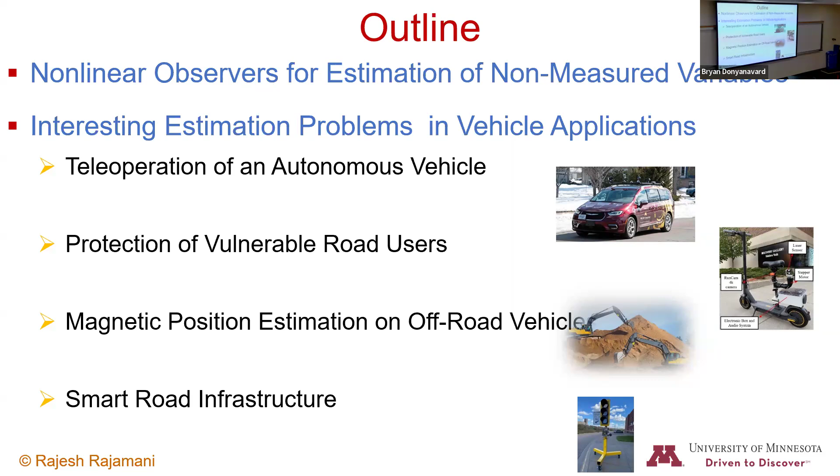Yeah, it seems to. I think if you use the mouse to click the slide once, it should. Okay. Now, hopefully it's run. Okay. So

My lab does a lot of work on nonlinear observers. And what are nonlinear observers? Basically, they're used to estimate variables that we cannot directly measure. So typically, in a nonlinear observer, what you do is you have a dynamic model of the system and combine the dynamic model with some measurements to estimate all the variables that you're not able to measure. So some examples of estimation algorithms, observers, are as follows.

Use of an inertial measurement sensor and GPS to estimate variables such as slip angle and tire road friction coefficient. So slip angle on a vehicle is a very important variable. It's basically the angle of the velocity vector with respect to the direction of the vehicle. It's an important variable that you need to know because it tells you how the position of the vehicle is evolving, but it's not a variable that you can measure. Likewise, tire road friction coefficient tells you how slippery the road is, and that again is a variable that you cannot actually measure with regular inexpensive sensors. So what you do with estimation algorithms is you estimate these kinds of variables. You combine dynamic models together with well-designed algorithms and you estimate these variables. So those are called nonlinear observers, for example.

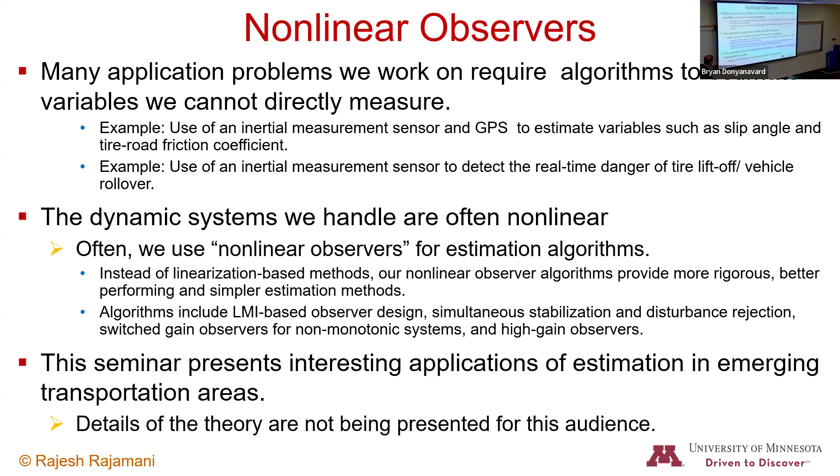And we normally publish theoretical papers primarily on observers for nonlinear systems. So these are some examples of theoretical papers that we've published in the last few years, in Automatica, in IEEE Transactions on Automatic Control, IJRNC, and so on. So all the theoretical work we do is on this topic, observer design for nonlinear systems, and we publish those kinds of papers. But this talk is really not going to talk about these theoretical results.

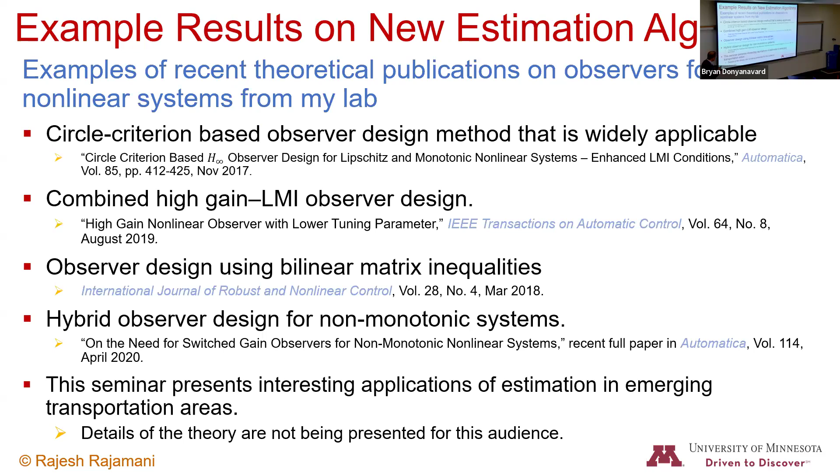As far as today's talk is concerned, we're just going to see how estimation is used in some very interesting applications, and how it enables some novel applications. That's what it's used for. Okay, it seems like my pointer is working now. So the first topic I'm going to talk about is teleoperation of autonomous vehicles.

What is the motivation behind teleoperation of an autonomous vehicle? We say that autonomous cars need occasional human intervention and teleoperation. Typically when you're testing an autonomous vehicle, there is a safety driver in the car, and if something goes wrong, the safety driver takes over. But you need teleoperation if you want to scale up deployment, otherwise you'd need a safety driver in every autonomous vehicle on the road. So that is one of the motivations for having teleoperation.

Teleoperation is used widely in a bunch of applications in the real world. I don't know if your campus has food delivery using robots, but our campus does, and that is entirely teleoperated. You can order food, the robot comes to the door of your building, you enter the code inside the robot, and then you take your food. So that is a widely used teleoperation application.

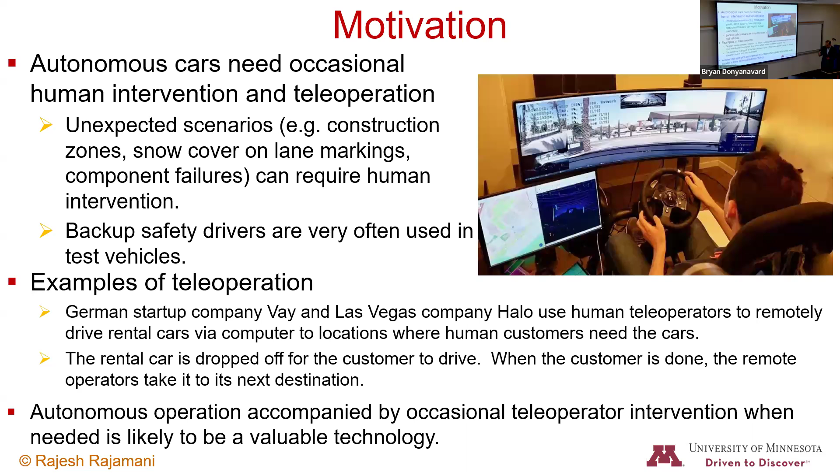So what we feel is that autonomous operation accompanied by occasional teleoperation or operator intervention is going to be a very valuable technology in the future. Now what I'm going to talk about today is one aspect of teleoperation called predictive display.

For teleoperation, what you need to do is transmit a lot of camera images from the remote vehicle to the teleoperator station so that you can recreate the environment of the vehicle for the teleoperator. The teleoperator needs to see what the environment around the remote vehicle is so that he or she can drive the vehicle remotely. So you need to recreate that.

Now, the challenge with recreating the remote vehicle environment is that camera images are bulky, it's a lot of data, and you need to transmit that using wireless networks. You might not have 5G everywhere, and even with 5G, it's very difficult to actually transmit camera images sufficiently fast. So what happens is you end up getting a lot of variable latency, meaning the camera images arrive after quite a bit of delay.

What we have found is that if there is a delay of even 170 milliseconds or more, it starts becoming quite difficult for the teleoperator to drive the car. So the technology that we are working on is called predictive display.

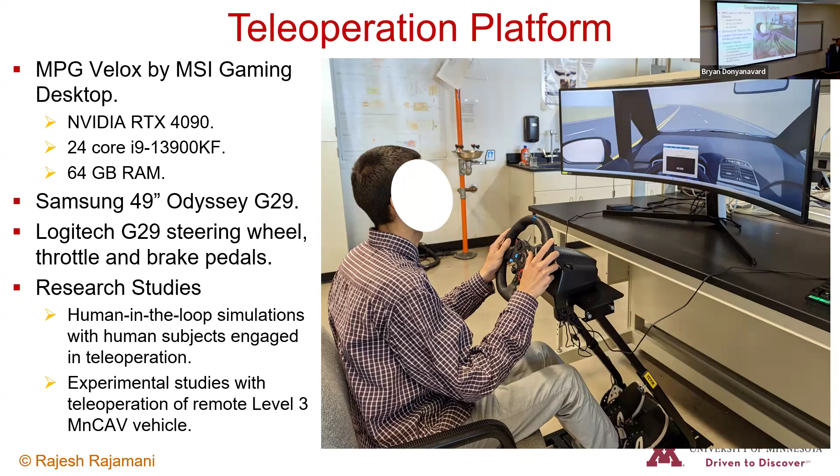There are two types of studies that we've done so far on teleoperation. We have done human-in-the-loop simulation studies, where we have simulation software and a human subject controls one of the vehicles in the simulation. We also have an autonomous vehicle, and we want to do experimental studies using our autonomous vehicle for teleoperation.

Let me tell you a little bit about one aspect of teleoperation that we have addressed: how to track trajectories of nearby vehicles. For the remote vehicle, we need to track the trajectories of all the nearby vehicles, because we need to use that information for updating the display.

So what has happened in the past is that target vehicles are tracked using estimation algorithms, but they are often modeled by very simplistic dynamic models. For example, the model might say each vehicle has decoupled lateral and longitudinal motion, with lateral acceleration equal to 0 and longitudinal acceleration equal to 0. So those kinds of simple models are typically used, or the kinematic model is used.

In this kinematic model, the states are position, velocity, acceleration, orientation, and slip angle, with some kinematic equations. It turns out this type of model is good for inertial position and inertial trajectory variables of the vehicle, but not good for relative variables. Because the radar on your car is on a moving car, your car has rotational motion and accelerations, and you're measuring the distance to another car with it. Because it's a relative measurement instead of an inertial measurement, this model gives you errors and doesn't work all that well.

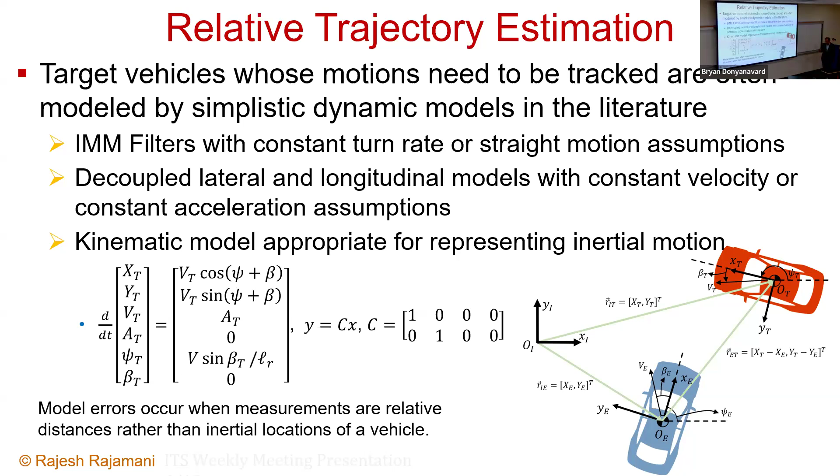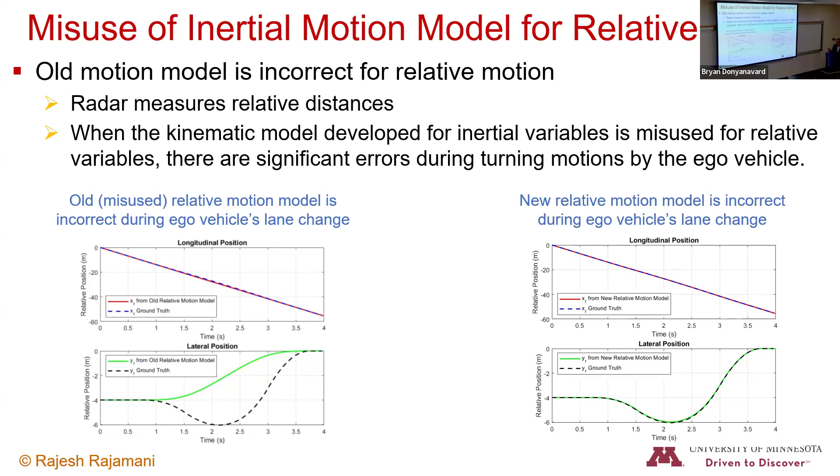So what we have done is found the right kind of model to use. What we do is write down the inertial dynamics of each of the vehicles, the ego vehicle and the target vehicle. We write down the inertial dynamics of each, define state variables which are the relative motion variables, and find the dynamics of the relative motion variables correctly.

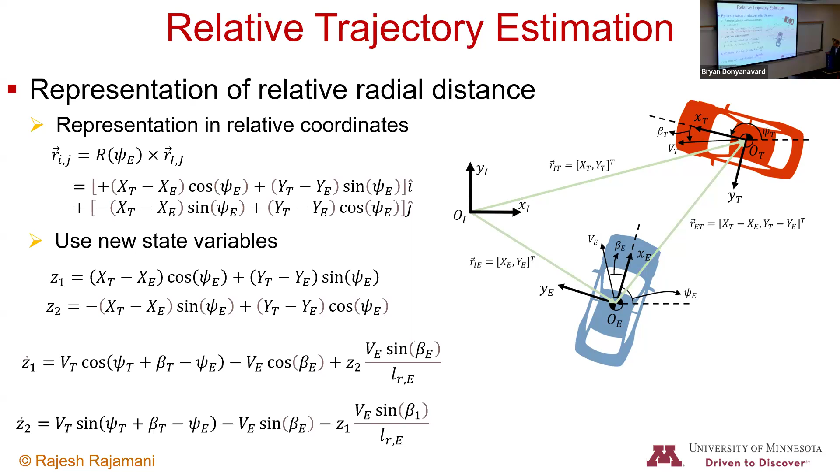And this is the type of model we get. This model has 6 states. The states are lateral and longitudinal relative distances, and then velocity, acceleration, orientation, and slip angle of the target vehicle. So it's a combination of relative variables and variables related to the target vehicle. Those are the states, and then we have nonlinear dynamics, as you can see here.

The inputs to this model are - we assume that the velocity of the ego vehicle and the slip angle of the ego vehicle are known. These are variables that we need to estimate as well. So this nonlinear model together with nonlinear observer design is what we use for estimation of trajectory variables of each tracked target vehicle.

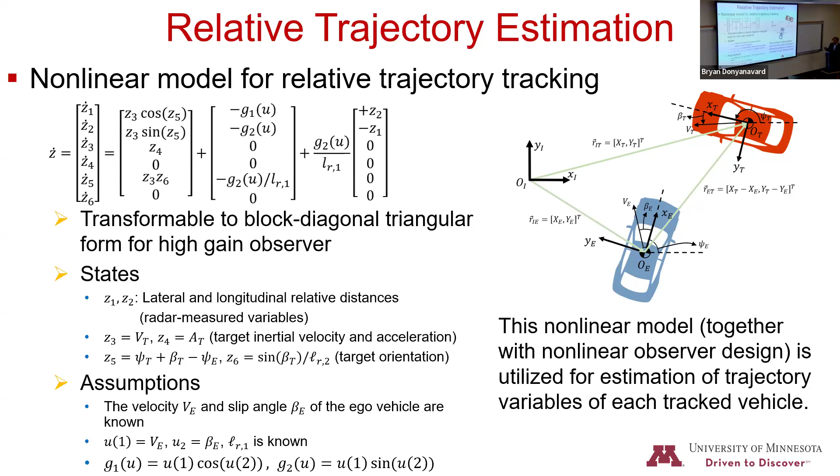So now what I'm going to show you is how we use these algorithms for estimating. We estimate the ego vehicle position and orientation, and we estimate the nearby vehicles' position and orientation. So we use that for predictive display.

The human subject studies that we have done with the simulation model: there are going to be 5 human subjects, and they're going to drive on this route that you see over here. Some parts of the route are pretty curvy, so the driver has to really pay attention and drive properly in order to stay on the road and not leave the lane.

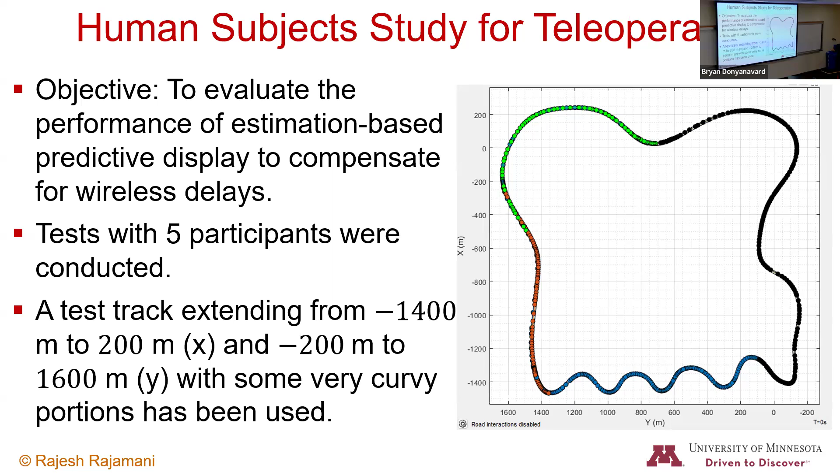This is what the simulation model looks like. In this particular case, we have 4 lanes here, 2 in each direction.

This is what the teleoperation station looks like. You are basically sitting here, and it is very similar to how a real car would be. You are going to see the road through this, and you're going to do teleoperation. The speed of your car is displayed over here, and you can see the lane lines and so on.

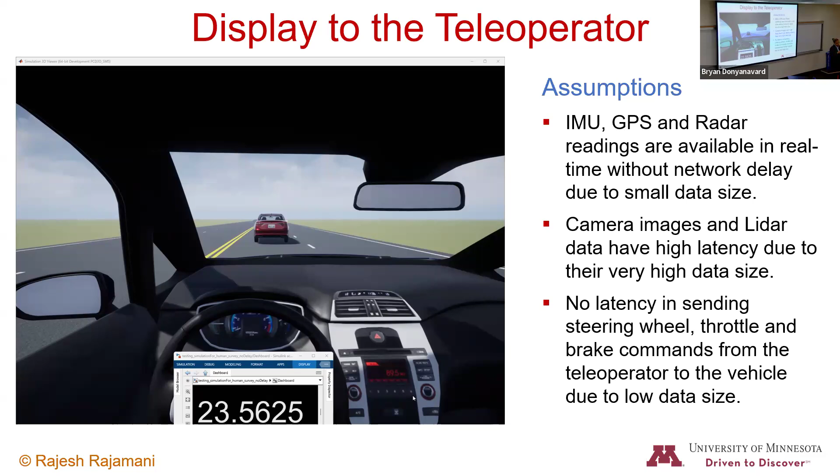So we assume that there is no latency in sending steering wheel, throttle, and brake commands from the teleoperator to the vehicle, due to low data size. These are variables that have very small data size, so there is no latency in sending your throttle and brake commands. But there is a lot of latency in receiving the camera images.

This video basically shows you what happens when there is a 0.5 second delay. I told you earlier that even a 170 millisecond time delay starts becoming difficult. This video is going to be with half a second of time delay, and with half a second, it is very difficult for the teleoperator to do that - almost impossible.

Let's look at this video here. The teleoperator is trying to drive and stay on the road, and he's not able to do a very good job. You can see here that the car keeps leaving the lane, he's going outside the lane, because of the half a second delay. It's pretty difficult to drive with the half a second delay.

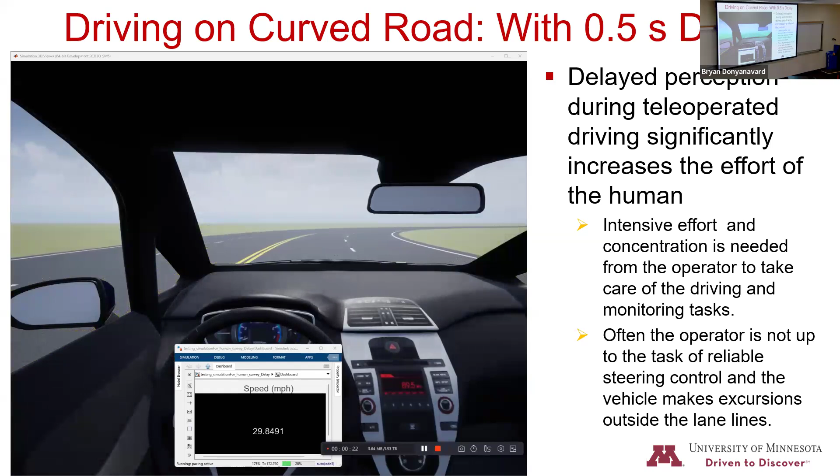There is intensive effort needed for the teleoperator as well because of the time delay. You have to really be paying a lot of attention and trying very hard, so this makes the driving task very difficult. And in spite of the driving task being very difficult and requiring a lot of effort, you keep going out of the lane. Pretty difficult task.

Now, on the other hand, with our predictive display system, you'll see in this video that the driver is able to stay in the lane. It becomes much easier to drive. Also, the driver is actually able to use much higher speeds, stay in the lane, so the driving task really does become much easier.

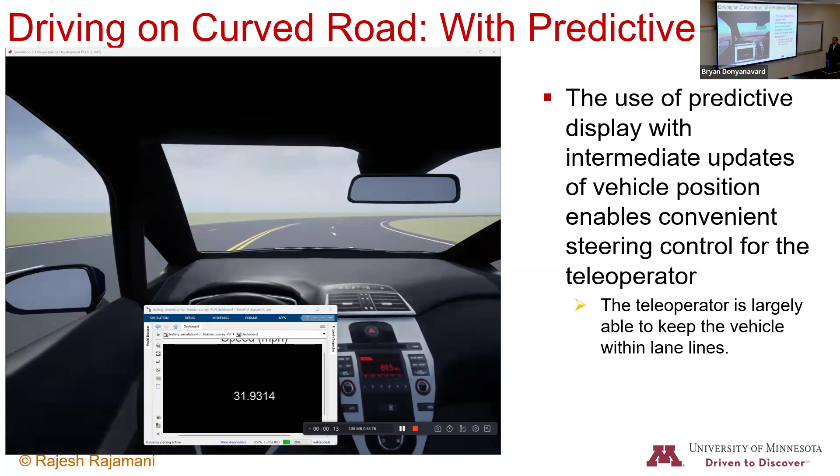So this is driving with the predictive display, and unlike what you saw in the previous video, here the driver is able to stay in the lane, not really going out of the lane at all here. So this is what predictive display is useful for.

So if you look at our data with the 5 human participants, each participant was driving for 10 minutes in each of 3 scenarios: without any time delay, with a half a second time delay, and then with the predictive display. First, he or she drives without any time delay so they get used to the simulator, then with the half a second time delay, and with predictive display.

What you can see here is when there's a half a second time delay, the driver goes out of the lane many times, approximately 11 times out of the lane. On the other hand, with the predictive display, the performance is as good as that of the system without any time delay, so the user hardly goes out of the lane.

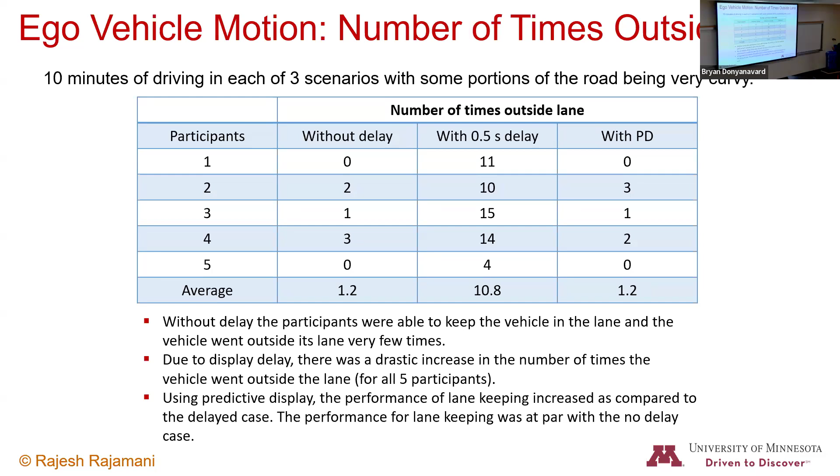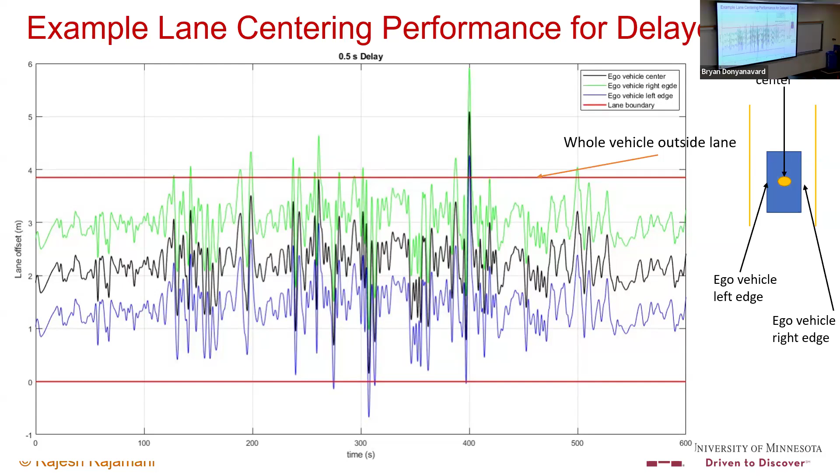Furthermore, the excursion outside the lane can be very big when you have a big time delay. This is an example from one of the human subjects, showing the lateral distance, and you can see that the edge of the car is going outside the lane. Not only is it going outside the lane, it has a pretty large excursion, like 2 meters outside the lane. On the other hand, with the predictive display system, the car is entirely inside the lane for this particular example.

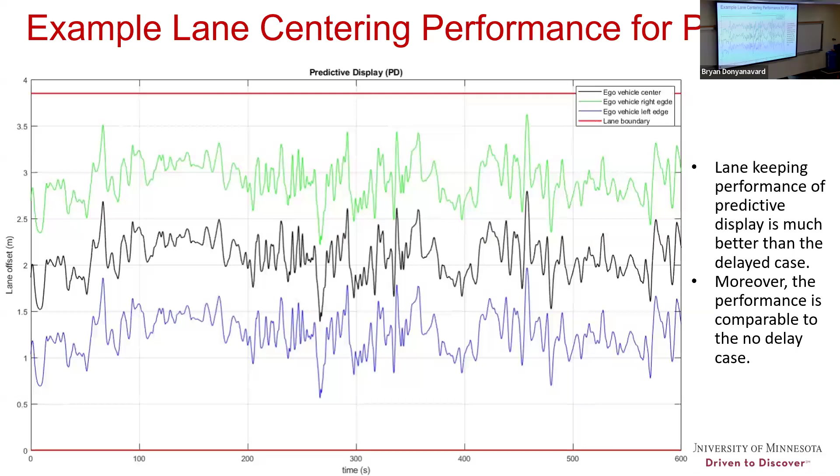So that is work using the simulator and human subjects. Now, what we want to do next is actually use this on a real autonomous vehicle. This was a simulation study, even though we used human subjects for experimental inputs, but now what we want to do is use this with an autonomous vehicle.

So what we are doing for that is developing this predictive display system so that you can use real camera images. In this predictive display system, we use a combination of LiDAR and camera images. We take the LiDAR point cloud and project it onto the camera image. We find all the pixels on the camera image which have the LiDAR points, and then we know the distances to those points.

Then what we do is state estimation. For the ego vehicle, we find the new position and the new orientation of the ego vehicle. In other words, if you have a camera image and you know the distances to all the pixels on the image, and you know that the ego vehicle has moved this much with this new orientation, then you can take the old camera pixels and transform them to create new camera pixels. So then you get the refreshed or updated camera image.

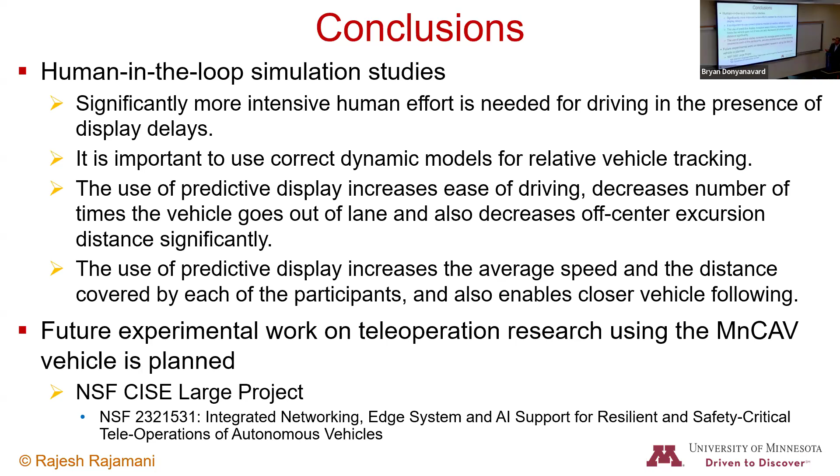Okay. Sorry, I'm going in the reverse direction.

Okay, so this is the autonomous vehicle we have at the University of Minnesota. It's called the MnCAV vehicle, basically a full-scale Chrysler Pacifica minivan. It was set up by a vendor called Dataspeed, a pretty well-known vendor, and they instrumented the vehicle with a whole bunch of sensors: 3 Ouster LiDARs, a dual antenna GNSS system, a whole set of cameras, a forward-looking radar, a rear-facing radar, IMUs, and lots of other sensors.

Then they set up ROS-based software for vehicle control, wiring all the sensors to computers. They have done some low-level work on the vehicle, like enabling it to follow a desired acceleration and enabling the steering angle to follow a desired steering angle. So they implemented some of these things, and then my lab has actually implemented some of the autonomous driving functions on this vehicle.

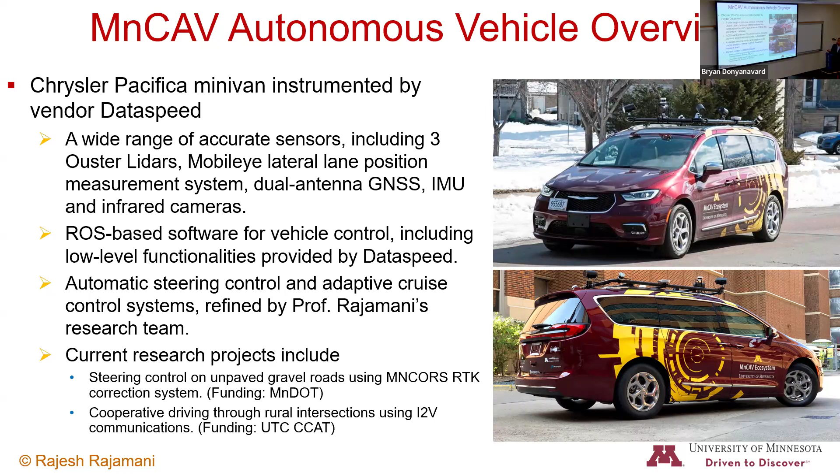Okay, so we have a couple of projects using this autonomous vehicle in my lab. One is on steering control on unpaved gravel roads using GNSS - this is a project funded by MnDOT. We also have a different project on cooperative driving through rural intersections using communications from the intersection, funded by a UTC, University Transportation Center. So these are the 2 projects on the autonomous vehicle that we are working on.

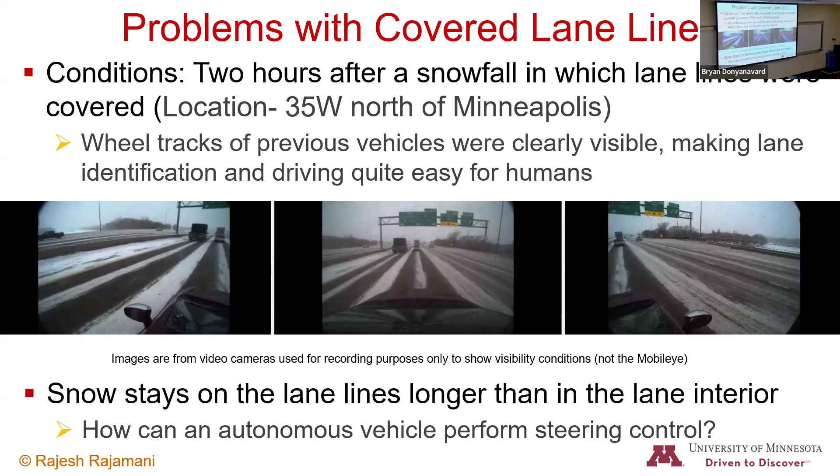We have collected data that shows that snow stays on the lane lines longer than in the lane interior. And there are also other situations where lane lines may not be available for steering control - not only snow-covered roads, but also low-volume rural roads, including gravel roads. These low-volume rural roads may not have any lane lines, they may not even have a center line because these are small roads. So you really cannot depend on lane lines to use your camera and drive.

Also, some states have a lot of gravel roads. In Minnesota, we have over 70,000 miles of gravel roads - 70,000 miles, okay? So gravel roads have absolutely no lane lines. There's other kinds of problems with gravel roads as well - their quality keeps changing with time, and they have to be cleaned up and pressed every once in a while.

So how do we drive on such types of roads? Now that is important because one of the applications we will talk about for autonomous vehicles is actually rural environments. In rural environments, you might not have much public transit, and you might have older people who are not able to drive. If you have autonomous vehicles, that would be incredibly useful. But in rural environments, you also have a lot of gravel roads and low volume roads.

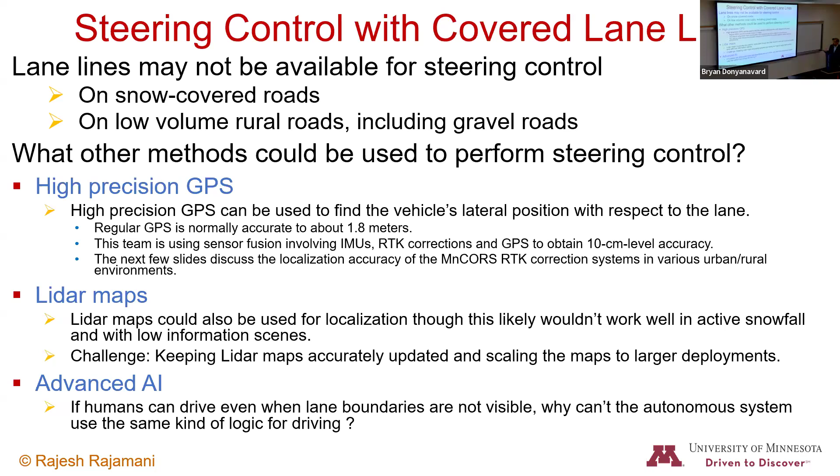We have some of this MnCORS that supposedly works all over the state, and that's what we're trying to use for our driving, for our driving of the MnCAV vehicle. So how well is MnCORS going to work? How accurately can you find your position, and can you do steering control using GNSS? That is the question.

It turns out that in rural environments, this is the rural road, you get more than 20 satellites all the time. On a rural road you have clear visibility to the sky, good visibility to the satellites, and you can see all of them. More than 20 satellites are visible here all the time, so you're going to get pretty good GPS measurement over here.

But if you look at downtown, out of 14 minutes or so of driving, for 4 minutes there was absolutely no signal. Downtown you have all these tall buildings, so you might not have any GPS at all for a significant portion of the drive, and sometimes you have very few satellites available, sometimes none, sometimes very few. Local roads, basically suburban roads, you can again have some pretty good satellite visibility, but if you have local roads with trees, then you can lose visibility to the satellite sometimes as well. So that is another thing to keep in mind.

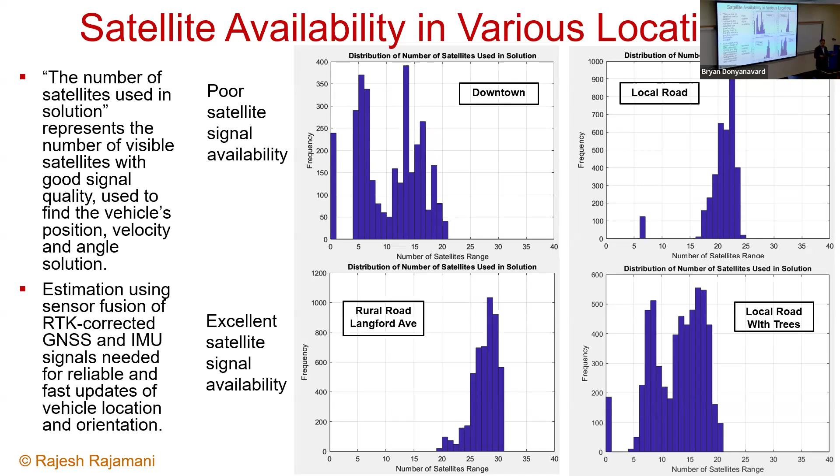This is a system that we have developed and implemented on the car. It's basically a feedback plus feed forward control. You need a feed forward term for going around sharp curves. For going on straight roads, you only need the feedback term.

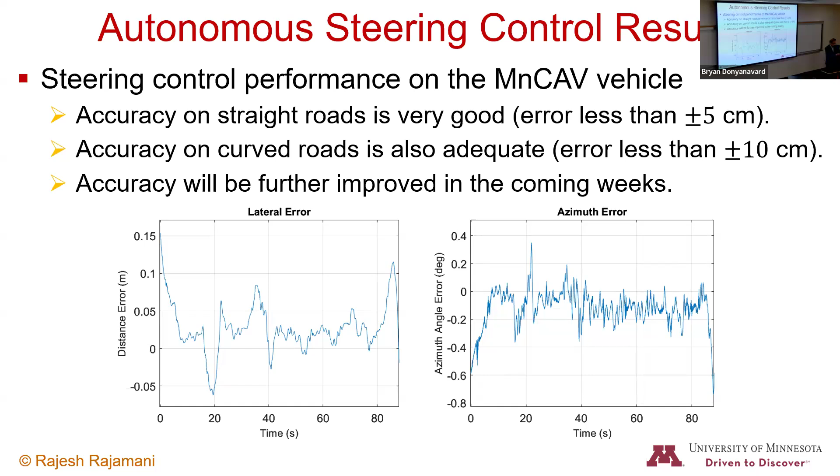Okay, so I'm moving on now to the next one. These are all projects that have used estimation algorithms for enabling some interesting autonomous driving applications. Now I'll talk about a different application in which we've used estimation algorithms again.

This is on wake surfing boats and off-road vehicles. This is an entrepreneurship-related project, funded by an NSF-PFI grant.

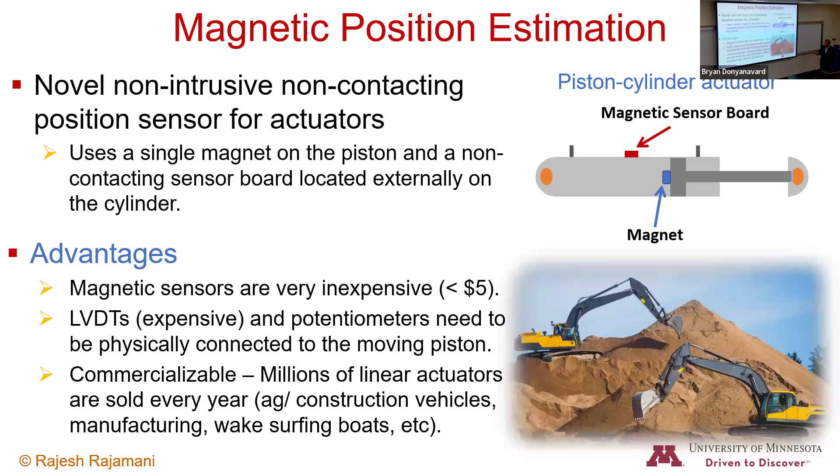Now the advantages of this type of system are that magnetic sensors are very inexpensive—depending on the sensor, it could be $1 a sensor. So we're competing with other sensors like LVDTs and potentiometers. Millions of linear actuators are sold every year for ag vehicles, construction vehicles, manufacturing, wake surfing boats, and so on. So the market for actuators and the need for position sensors on them is actually pretty big.

So you can use them, for example, to see if the actuator has reached the end of stroke. It's just a proximity sensor. But if you actually want to measure position throughout the stroke, then you need to use the magnetic field, as you can't just use a threshold.

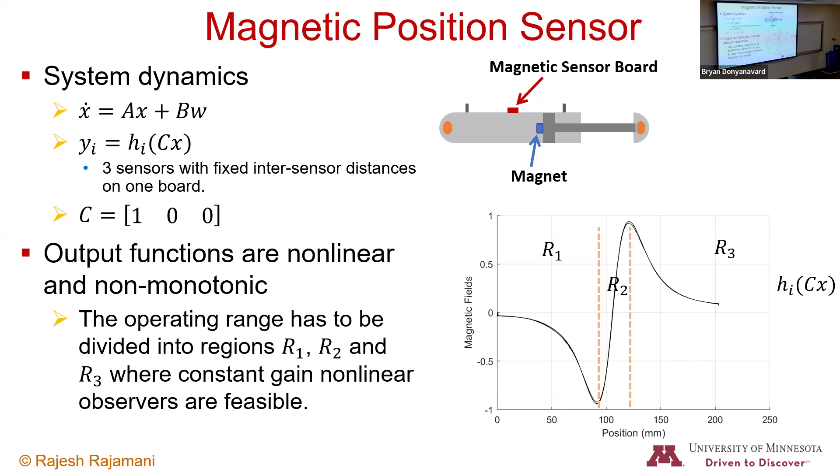You need to actually model the magnetic field as a function of position and then use that. So this is what we do here. We use this model, and then we divide the region into 3 regions which are monotonic, since otherwise this is a non-monotonic function. Then we use a nonlinear observer design method that relies on the nonlinearity being monotonic, so we essentially have 3 different observer gains for these 3 different regions.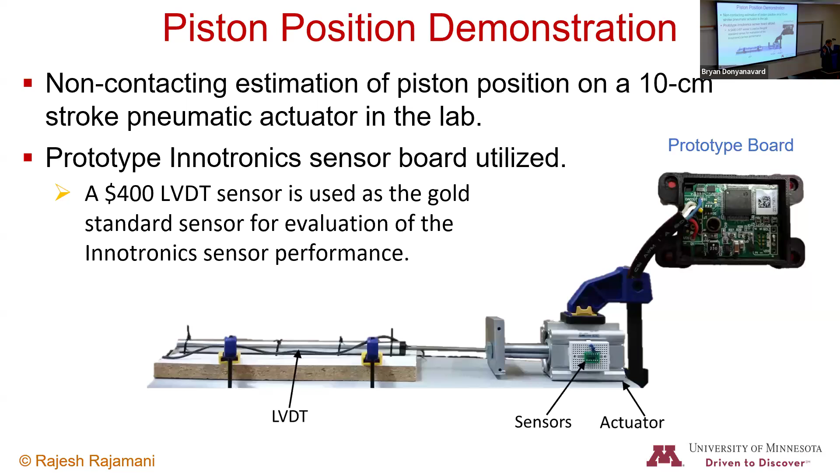Now the LVDT is a really good sensor. It can give you 0.1 mm accuracy. But it is $400. Plus it needs to be physically connected to the piston. Our sensor, on the other hand, is a $50 sensor. It doesn't need to be connected, you just put it on the outside. No connection, right? It's a non-contact sensor.

So our company is called Innotronics, our startup company. And this video here... I think I need to click on the video.

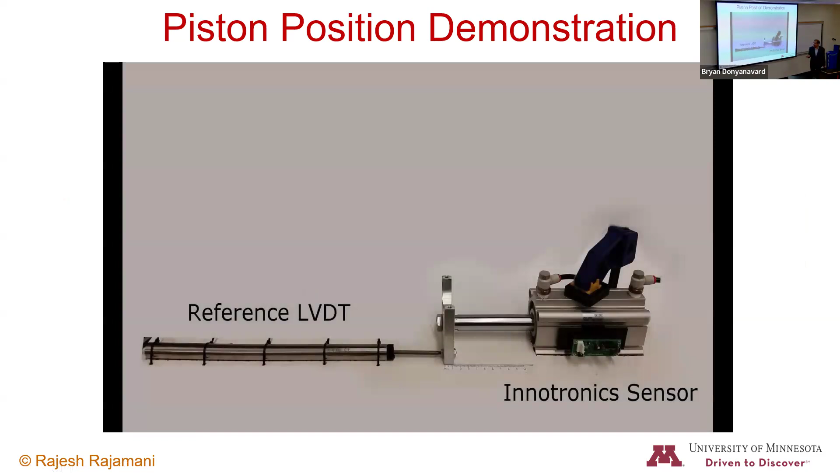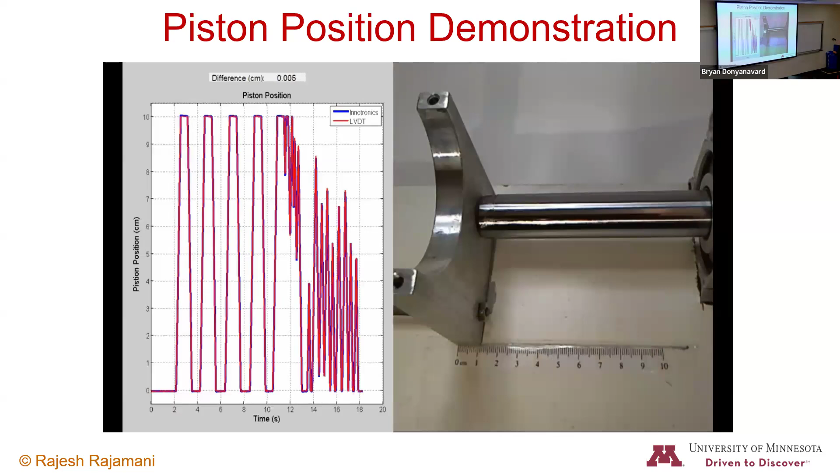So what you can see here, this is the actuator, and this is the real position that you can see in the ruler. And here you can see our estimates and the LVDT sensor readings. You can see that our estimates and the LVDT sensor readings are kind of on top of each other. You can also have high bandwidth motion, fast motion, and you can still track the position quite well.

Typically for this 10 centimeter stroke length, we get less than 1% error, less than 1 mm error, as you can see over here. So this is the estimate versus the LVDT reading, and you can see that the magnetic sensor follows the LVDT sensor quite well.

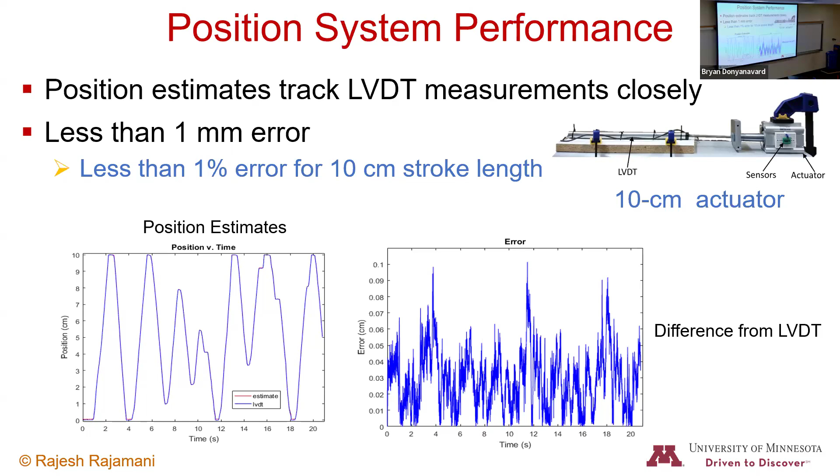So what we are working on now, we have this new NSF PFI-TT project. We're trying to make this technology work better for long stroke actuators, because this was a small stroke actuator, 10 centimeter stroke. You can imagine on a construction vehicle, they're going to have like 70, 80 centimeters, one meter kind of stroke. So it has to work over a very long stroke. That's what we're working on now.

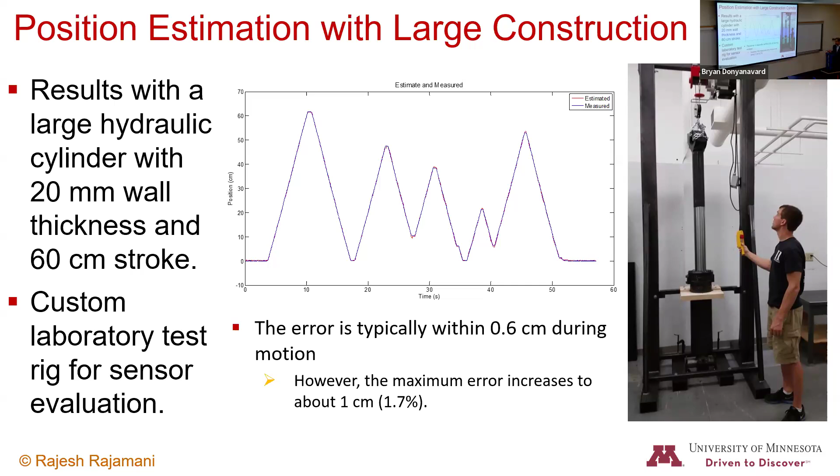And so this is a test rig we have in our lab. This is basically a thick walled cylinder with a long stroke. There is a motor and a winch that we have for moving this up and down, and then we can put magnetic sensors on it and do estimation. So this is what we are working on.

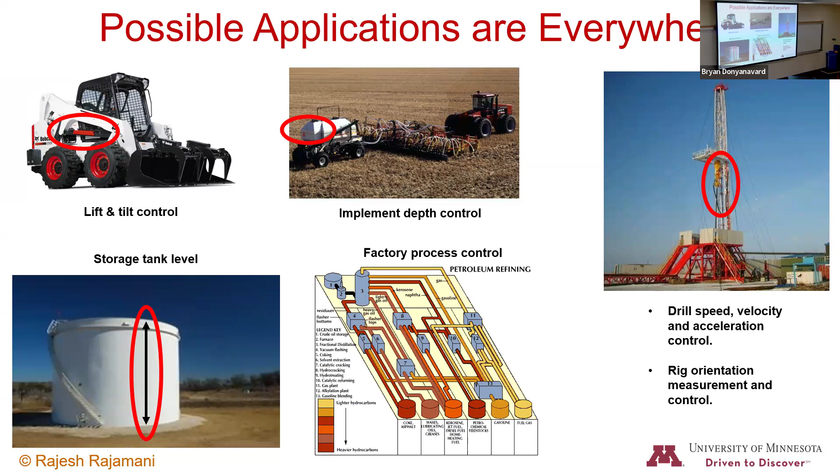So there are a lot of applications for these actuators, like I told you. This is called a planter, an agricultural vehicle, in which they have 30 actuators. They actually have 30 actuators at the same time seeding the soil. All the 30 actuators are being used simultaneously, and such actuators are used in all kinds of oil rig applications and so on.

So we established this company in 2015, basically, and we are selling currently over 11,000 sensors a year. We had a slight hiccup last year where they ran into some problems, and so those problems have been fixed, and so we are hoping that the sensor sales take off some more.

But basically, right now, we have mostly one customer for the sensor. It's boat manufacturer Mastercraft, and they use actuators behind the boat for doing wake surfing and wakeboarding. So they customize the waves behind the boat by using an actuator, and our sensors are being used on those actuators for measuring position. So currently we only have one customer, but we are selling quite a few sensors to that customer.

And if our sensors become more reliable in the future, if they can work for longer stroke actuators, then we might be able to find more customers in the future.

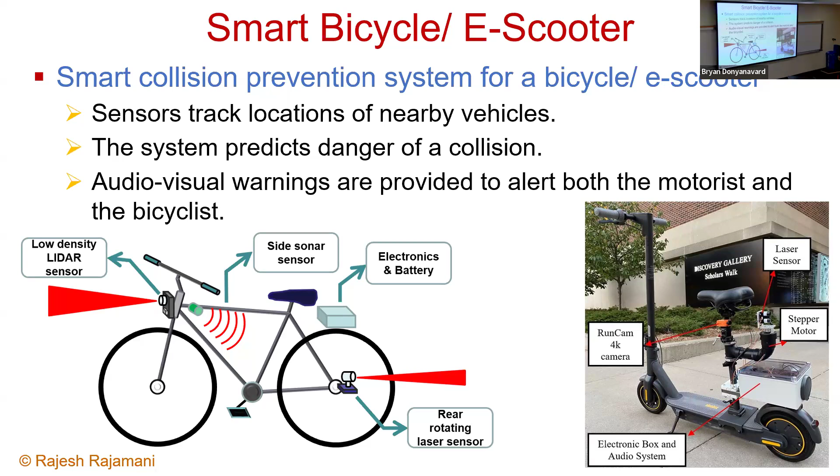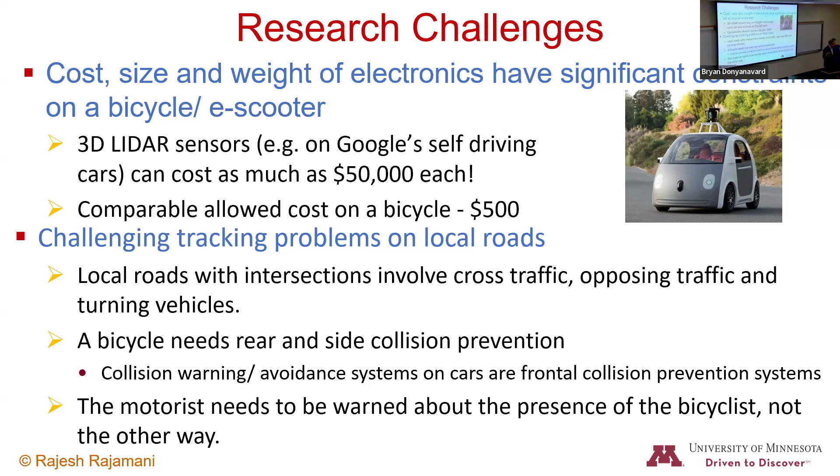Our cost target is $500. The total cost of all the components of the bicycle, sensors and so on, should be $500 or less. One of the systems that we've developed, and I'll show you this particular system, is essentially a $100 sensor.

It's a single beam laser sensor. It's got a pretty good range in terms of range. But it's a very thin beam sensor, so it doesn't have a wide aperture, you don't have a wide field of view. It's a very thin beam. It's $100, so that's pretty good, it's a pretty good sensor.

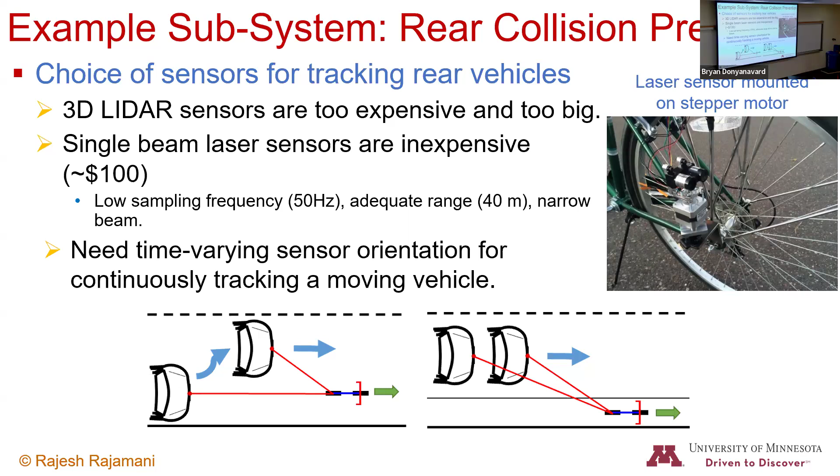What we do is mount it on a motor, and then control the orientation, so that we can follow any car behind the bicycle. If the car behind the bicycle moves, whether laterally or longitudinally, because we have a very thin beam laser sensor, we need to control its orientation so that we follow the car. We use receding horizon optimization for doing the orientation control, and we use estimation algorithms.

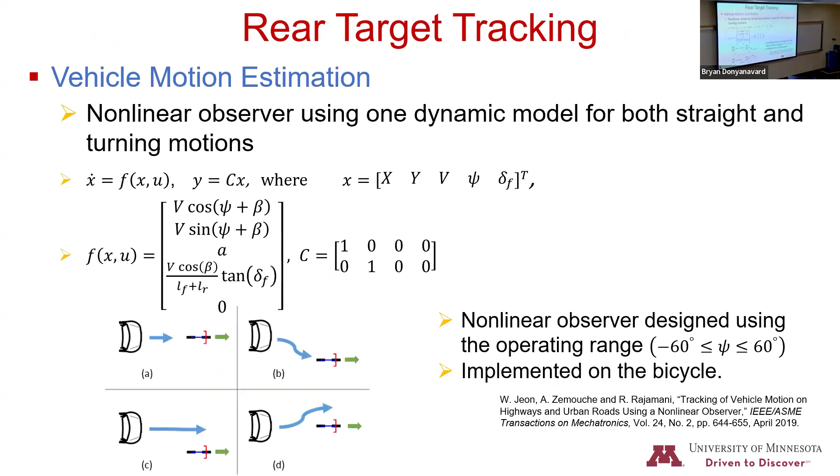What I'm going to show you here is this video, using an e-scooter. On the back of the e-scooter is the laser sensor mounted on a motor. This car is going to come straight at the e-scooter, and the sensor will track the car. When it senses that the e-scooter is in danger, it will sound a loud horn to warn the car. Not sure if the video will play right here.

I have to do that again.

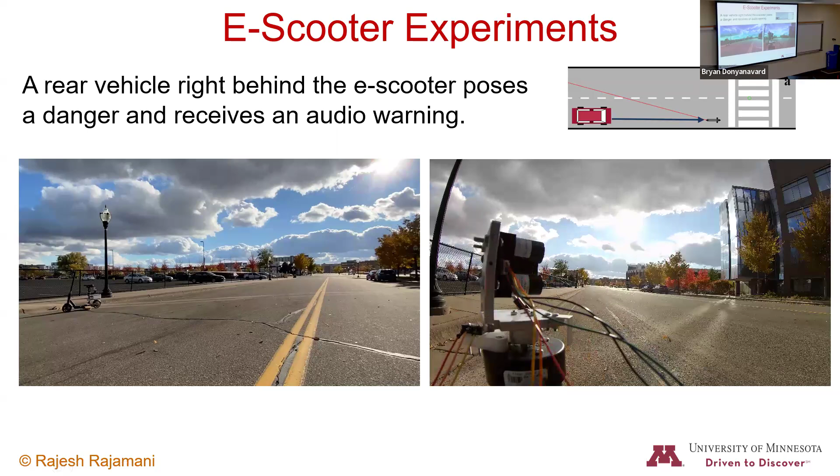If I play this video here, you can see the car is coming straight at the scooter. The scooter sounds an alarm, and then the car moves away. Here you can see the motor control for tracking the car with the laser sensor. I have a whole bunch of videos of this kind here. Here you can see the car behind the e-scooter doing some kind of a weaving motion.

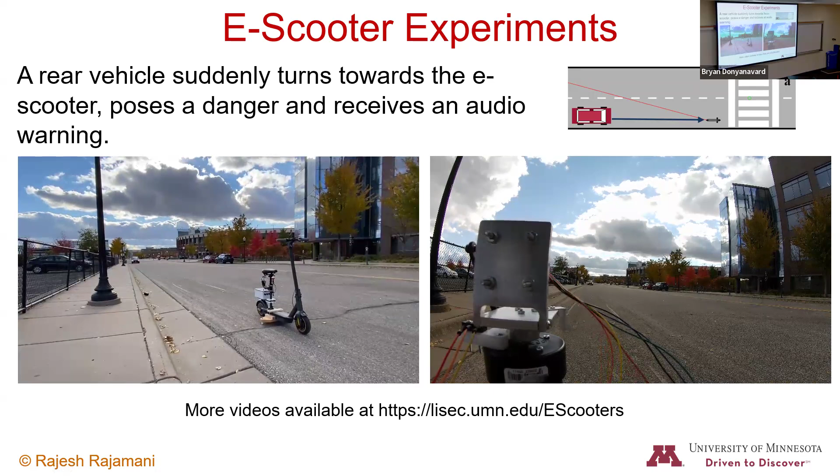We have a bunch of videos, and what we are trying to show you here is no matter what the car behind the e-scooter does, it can have a weaving motion, it can make sudden turns and so on, but in all cases, we are actually able to track the car by doing orientation control of the motor, and provide a warning.

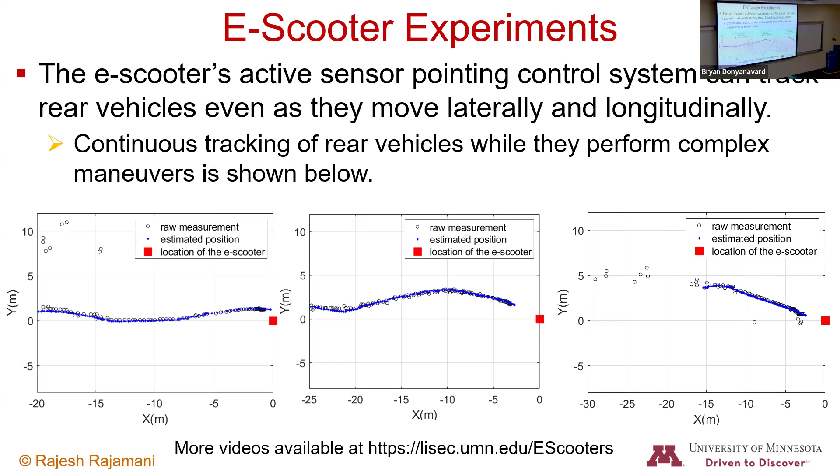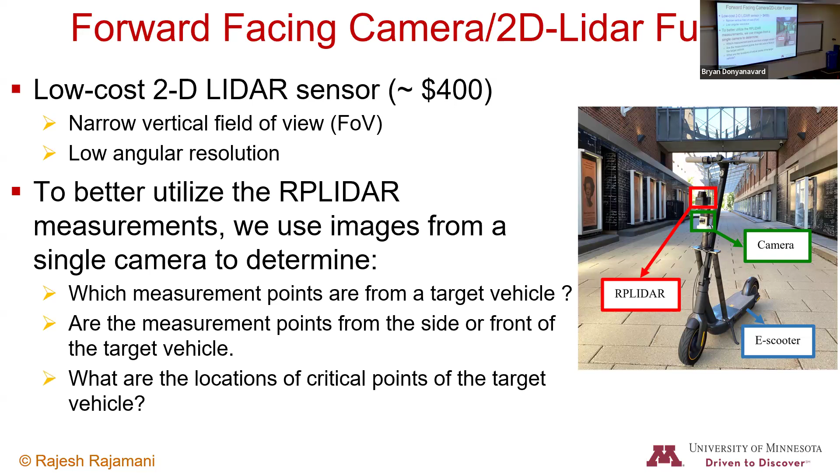One other interesting work on this system is combining a camera with an RP Lidar, which is a 2D Lidar, a low cost Lidar. But first of all, it is low density, we don't get much measurements from the Lidar. Secondly, we don't know where the measurements are from: is it from the side of the car or the front, is it lateral distance or longitudinal distance. We don't know those things, so it's very difficult to use the RP Lidar measurement.

So what we do is combine the RP Lidar signals with the camera. The camera basically draws a box around the front of the car and the side of the car, so we're able to find out which portion of the image is the front and which is the side. Then by projecting the Lidar points, we know whether the Lidar reading is from the front or the side, which gives you the lateral distance and the longitudinal distance to the car. So you're able to utilize the information from the RP Lidar.

So here you can see that we can detect the front and the side, and you can see where the RP LiDAR points are being projected to — is it the front or the side, essentially?

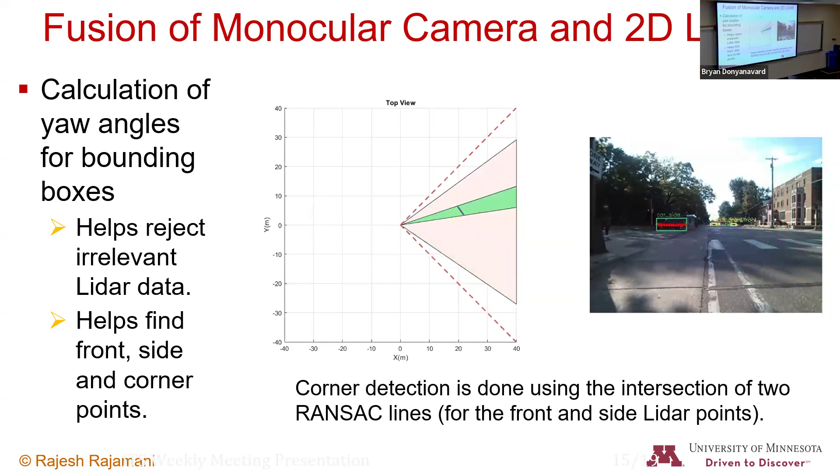So we are basically able to fuse the camera and the 2D LiDAR and estimate the distance to the right front corner of the car. The distance to the right front corner gives you both the lateral and the longitudinal distance, so that is really what we want to do.

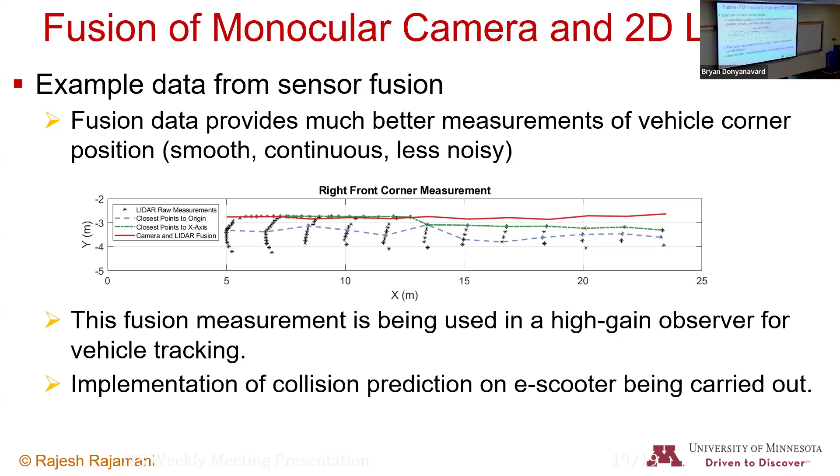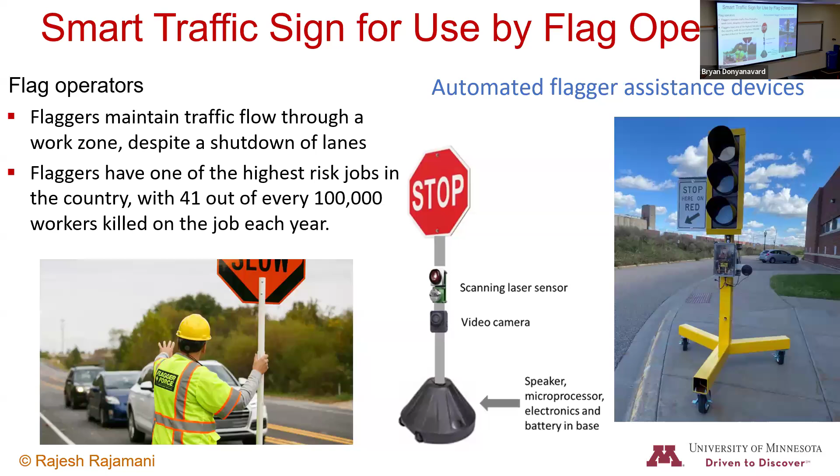We have other devices that we make for protecting construction zones and so on. These are some examples of devices built in my lab. This is a smart traffic sign — it's remote controlled, and it's got sensors on it to track vehicles correctly. These are other devices we've made, various kinds for protecting construction zones on roads.

We can detect if a car is going to intrude into the construction zone, and we can provide warnings and try to prevent intrusions. This is a very small portable sensor, and this is a more heavy, big sensor.

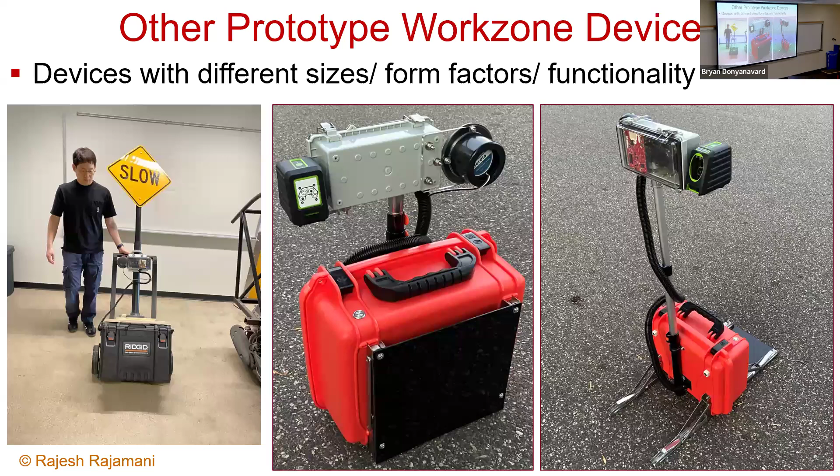So with that, I'll stop my presentation.